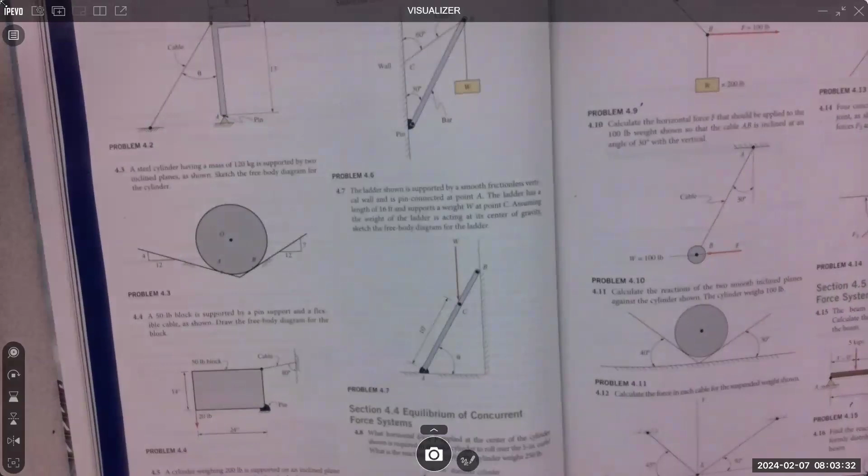So, 15 - how'd they go? How are you feeling about these? Yeah, pretty good. We need to go over it? Yeah, we should. That's okay. I think we should. All right, 15 and 16, back to the...

You didn't agree with the back of the book? No, I did. Oh, that's a good sign - most of the time that's a good sign. I didn't even look at the back. Nick, how are you? Good. Check.

Did you do the first set now of homework? No, because I already have your 15 and 16 set. I did that one again because I know I got the current one. Going back, I mean, I guess.

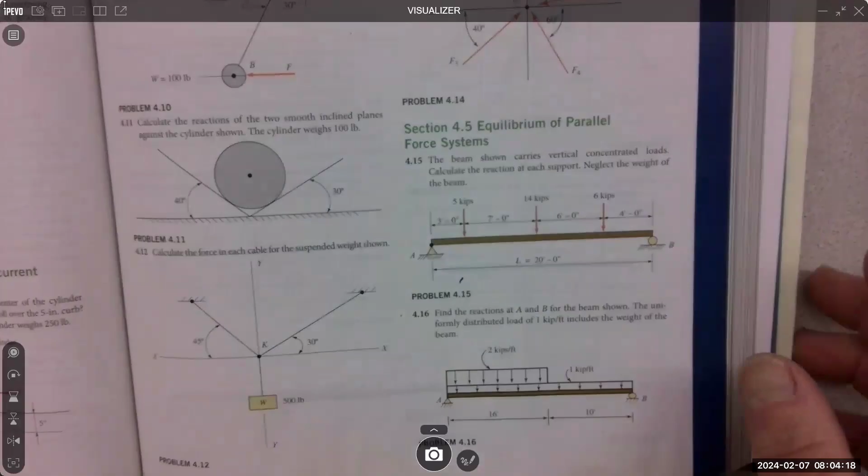Saving them for you. Yeah, all right. We'll do them - it's good prep for Friday.

How long do you think it's gonna take? I don't know, it was 8 problems last year. That was like... I think you should - I was like, maybe last year 2 problems, there's 7. 2 puts a lot of stress - that's a lot of stress on 2 problems.

50 real quick, that's like 50 points each. But if you just - you want to make them a 50-point problem? What if you screw it up? Just make them like the last quiz. I want to make them challenging for you so you feel good after you walk in. I don't think - feel good. I'm just gonna - no, about that, it's but like I hate it when I stress.

Like if you're gonna go for a run, you don't want to go for a 3-mile run, you want to go for like a 10-mile run to feel good about it. Not a great... you know? All right, I'll work on my analogies. Make the name half the point. You can write it down.

Okay, there's a free body diagram problem, that's like a free 20 points. I'm looking at 5 problems. 5 problems? Yeah, okay, so that should take like 30 minutes - if I struggle. Right, if you struggle. Okay, so 5 problems are gonna take me 30 minutes to do. So maybe usually multiply times 3, hour and a half.

Oh gosh - did you say if you have any review problems? We're doing them right now. Like everything we do today will be review problems, because after this, after we do homework sets, I'm just gonna review. Then we'll look at the homework set for Friday and work it, probably, or at least start it for you, so you have a good vibe going into Friday.

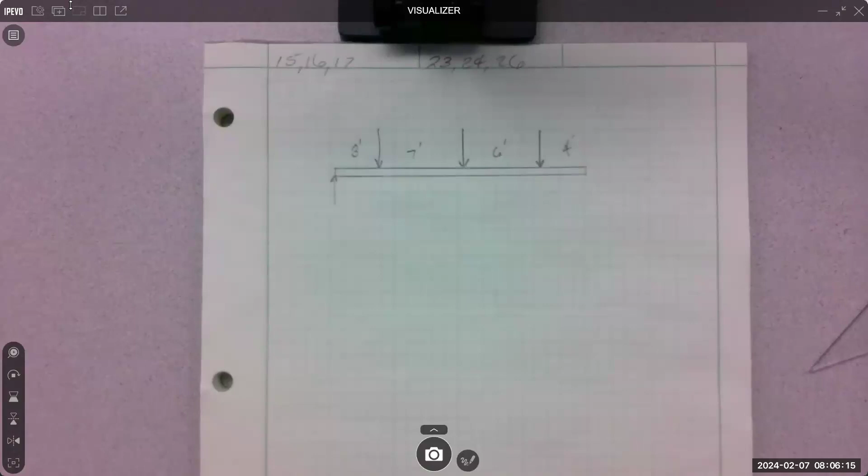Am I doing the right one? Yeah. Oh good, I don't wanna pull a Nick. How many reactions for a pin? I was just putting them in automatically. 2 - I'm gonna make a guess at up. Everything's coming down, so we need some up forces, right? How many reactions at B? Just one up, just 1 up, it's a roller. So that would be BY, AY, and AX.

5K - you can see this, right? Yep. 14K and 6K. 3 feet, 7 feet, 6 feet, 4 feet.

On Friday, it will say you do not have to draw separate free body diagrams on the problems. You can just kind of turn the problem into a free body diagram by putting your reactions right over the top of the supports, unless the problem says draw a free body diagram - then you should do that. That make sense? Yeah. So on the longer problems, you don't have to make additional drawings.

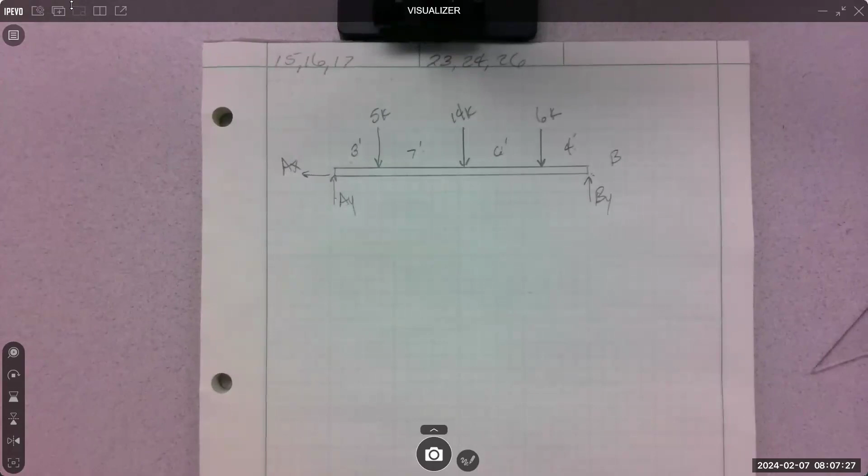All right, this one wants to know what? Exactly the reactions - calculate the reactions at each support. So I would need 3 things on Friday, 3 reactions, even though one of them is equal to 0 - yeah, I still want all 3. So even though you know AX is equal to 0, give it to me: AX is equal to 0. You can show me the equation if you want, if you don't, that's fine. I'll just know that you know, hey, if there's a single force in a direction, it's equal to 0.

All right, so then we need AY and BY. What are our 3 equations of equilibrium? What are the 3 equations? F of X equals 0. F of Y equals 0. And all the moments equals 0. Okay, so that is the definition of equilibrium, and that's the three tools we use for these. What kind of a force system is this - is it concurrent or non-concurrent?

Non-concurrent, because they don't go through the same - yeah, all the forces don't go through one spot. Yep, excellent. These kind of problems use all three. Okay, concurrent force systems are ones that look like this.

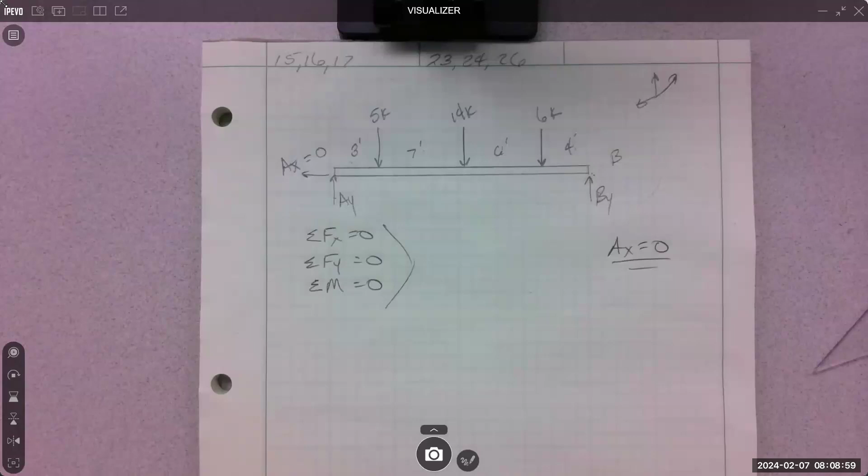Those don't use moments. There's no moment here, right? Because everything goes through one spot. So these just use sum forces in the X and sum forces in the Y. That's it.

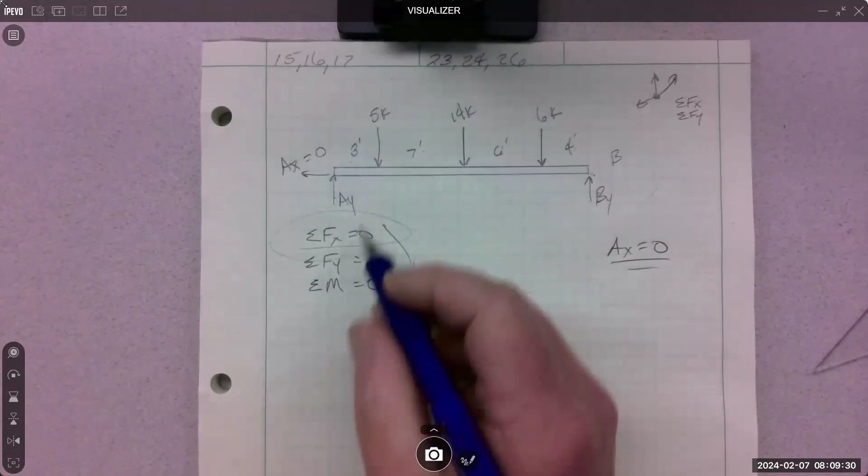No. Why not? Because you have two unknowns, two unknowns in the Y. Right? We could write it out. That's easy enough. And if you don't know what to do, just apply the equations, just write them out. Sum forces in the Y, what are all the forces in the Y?

Plus AY minus 5K, minus 14K, 6 gives minus 6K, plus BY equal 0.

On Friday, if you don't know what to do and it is an equilibrium problem, find the reactions, apply these equations, just apply, write them out, and you'll get some.

So this is when it says find the reactions, that's an equilibrium problem. If it says find the resultant, we're gonna have to remember what that means, because that's what we did for the first 4 weeks, right? This is week 5. So you're gonna get so locked into this, I'm gonna give you a problem on Friday that says find the resultant. And what are you gonna do? You're gonna draw me a free body diagram, and I'm gonna go, don't do that.

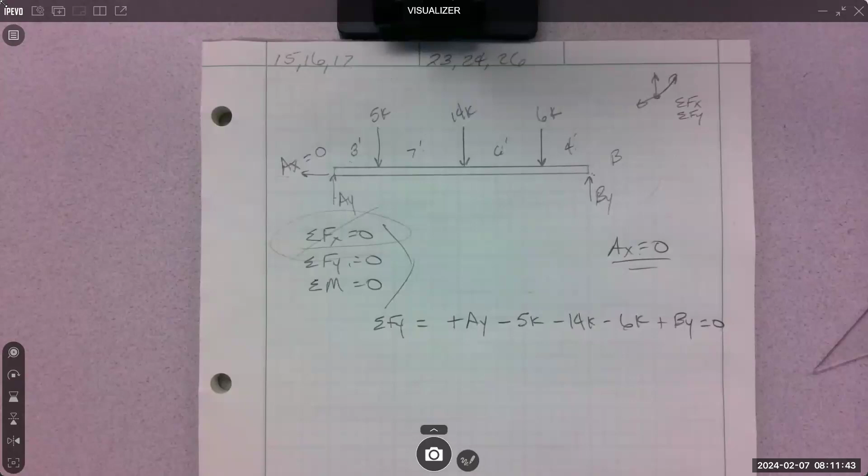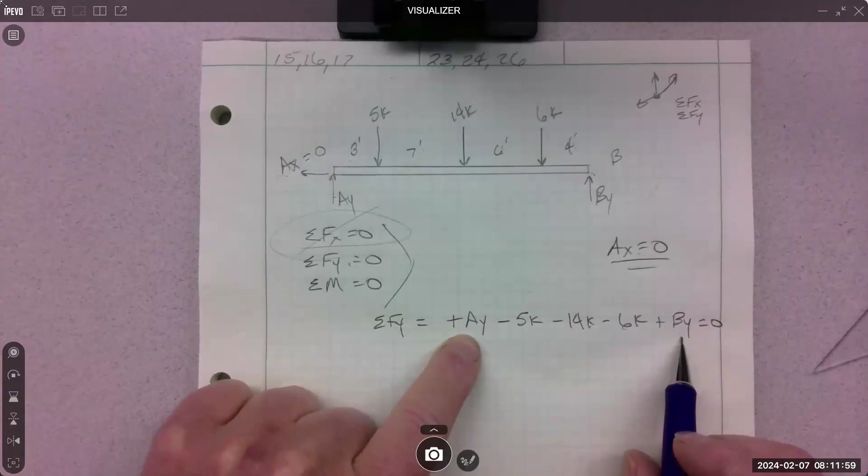Okay, so that's really important. You're gonna lock into that, like read it carefully and know your path. Because this is find the reactions, right? Not find the resultant. All right, 2 unknowns, we can't solve it. Correct? Correct. All right, what do we have left?

Yeah, moments. Most of these kind of problems, you're just gonna apply a moment right away to solve for something. Like I just start doing moments typically right away to get my unknowns. And then I might go back to summing forces in the Y. But you literally could go and sum a moment here, right? And what would be the unknown if I summed the moment at this spot?

BY. So I could solve for BY, right? And then I could do a moment here. And what would be the unknown? AX goes through the point, it would drop out. And we could solve for AY. So you could do 2 moments and solve the problem. You could also do a moment and then do this equation to solve the problem. So there's a couple paths that you can take.

All right, where do you want to do the moment? A. Why do we like A? Either way, it'd be the same. Just go with A. It will be, that's what I did. Either way, because we read left to right, so we always go to the left side. I mean, I do it all the time, right? But yeah, either spot is the same.

Because at B, there's 2 things that drop out if I do a moment here. What are the 2 things if I did it here? AX and BY drop out of the moment equation because they go straight through the point. If we do it here, what drops out? AX and AY both drop out. They go straight through the point. Okay?

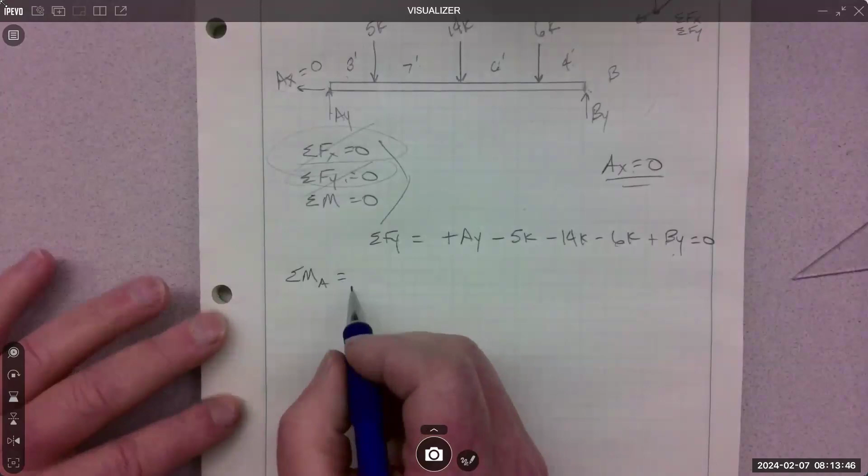All right, so let's do it today. After you decide where you're doing it, you just need to collect all the moments, everything that creates moment. Does the 5? Absolutely. 5K times what? 3 feet. What about the 14?

What's the rotation of this? Don't let me forget that. Is it going clockwise? Does the clock tick this way? It does, it's clockwise, it's negative.

Tell you, a crib sheet, a cheat sheet, whatever you want to call it, is more valuable than your book. You think it's awesome that you get your book? Well, it's 250 pages of trying to find something, right? But if you had a crib sheet with just notes on there to organize everything for the test, it's way more efficient.

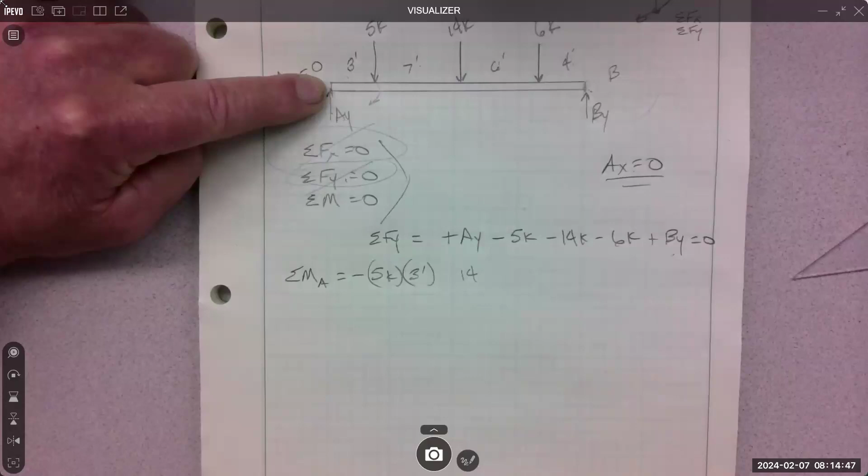I used to give extra credit for a good crib sheet. That'd be cool, should we do that again? Yeah, how many points? Well, 15 towards the exam, or how about 20, and you can eliminate one of the problems, toss it out. How many points is the test? It's 100 points. Okay, so actually that's fair, just turn in your crib sheet and walk out. Really, that's a good choice, great negotiation. Now I'm feeling pretty good about the 2 points that I want to give you.

All right, 2 points extra credit. If you have a nice crib sheet, it's gotta be a good crib sheet. It's gotta have chapters 1 through 4 included somehow. Does that sound fair? Sure, yeah.

All right, sweet. 14 times 10, rotation negative. 6 times 16, rotation negative. What else creates moment about here? By times 20, and its rotation positive. Set it equal to 0. You now have an algebra problem. Remember, this just goes away.

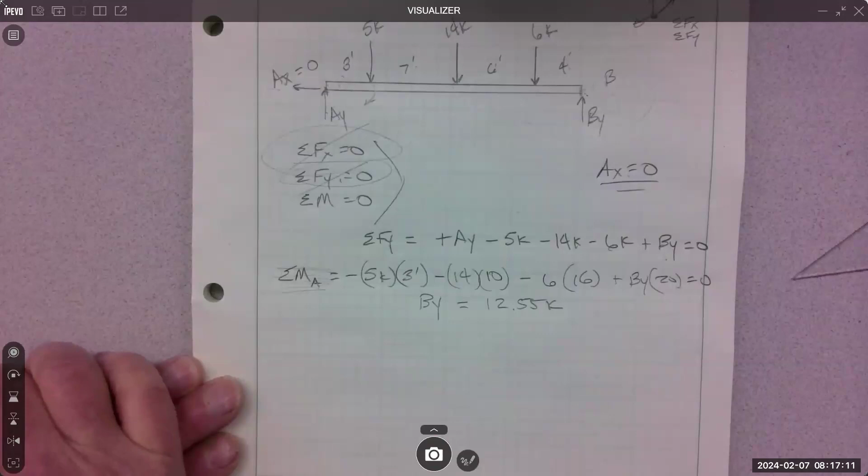All right, what do we get for BY? Somebody's got BY. 12.55 kips. Anybody else get that? Yep, thumbs up. And it came out positive, and that means our assumption is correct, our assumption of direction is correct.

So that'll trip up somebody on Friday, so be careful with that. If BY was pointing down and it comes out positive, that means you've made the correct assumption. It points down. We made the assumption it points up. We did the math, it came out positive. That means our assumption is correct in direction. All right, that means this is up.

So on Friday, the problem could say calculate the reaction at BY, and then it could give you information about that roller, like the roller at BY can support 15K. Determine if this is safe, right? So that would mean, well, we got a limit of 15K. We do the math, we figure out we're 12.55K at BY, we're good, right? Sometimes I try to make it a little more real than just an academic problem. Like, why would we be doing this? Well, we might be looking at this roller to determine if the load's okay on there.

All right, how do we get AY? Plug it into the Y equation? Yeah, so we take AY up here... 12.55K going up. Let me calculate BY. Oops, BY, sorry, I got reversed. And we calculate AY, right?

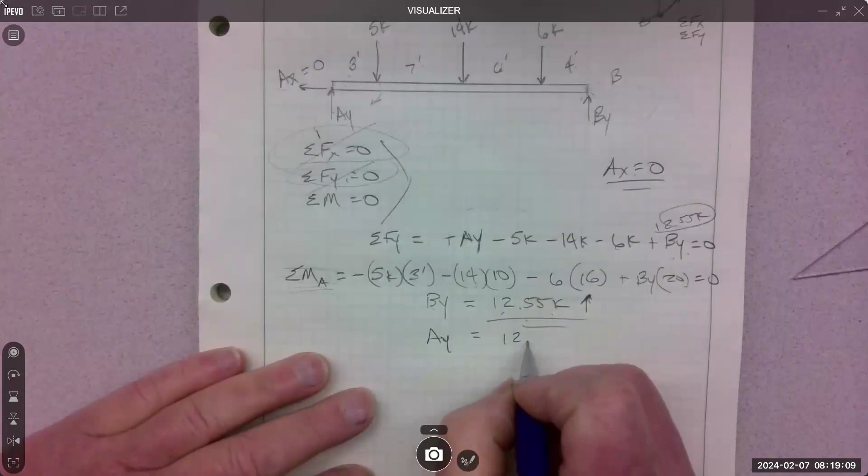What'd you get for AY? 12.45? Anybody else get that? Not that I don't believe Gina, but I believe Gina. So there they are, 1, 2, 3, right?

Find the reactions. Easiest problem because everything's parallel, right? If we had an angled force in here, how would you deal with that? Yeah, you just break it into its components and know that the X component would not create moment anywhere, and you would deal with that Y component for the moment piece.

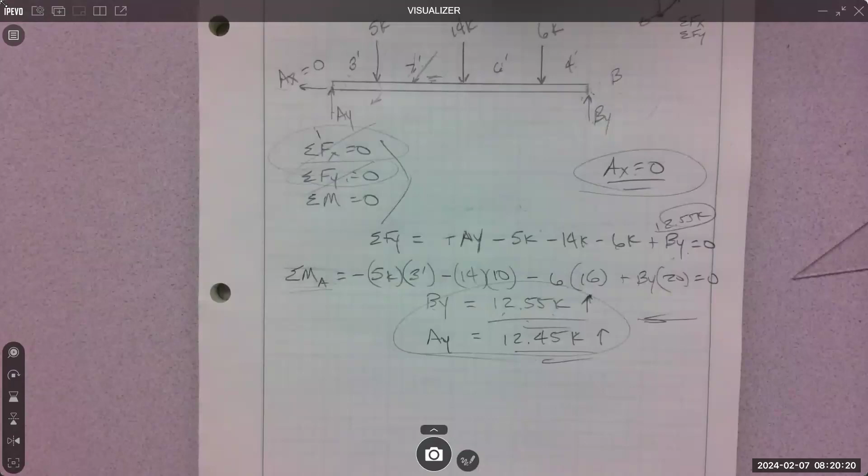Okay, so we've done some of those too. They're not difficult, problems are not difficult on Friday. They're of the simpler kind of problem. So if you have a resultant problem, it's not going to be a super hard one. Find the reaction problem, it'll be kind of similar to the ones that we had in quiz. Now, it might look like you're going to have to determine if it's a concurrent or a non-concurrent system, like it might not be straightforward. You might end up with a beam that looks like this, right? Has a roller, has a pin, and then has a force, and a force.

If it says find the resultant, that means don't mess with these forces, leave them there. We just want to know what the single force is of this thing. Is it concurrent or non-concurrent? It's concurrent, it's all right there. Even though I put it on a beam, all the forces are still in one spot. We would turn all this into some resultant single force.

So just identify the force system and identify what it's asking you, and then have a strategy ready to rock, and you'll be good to go.

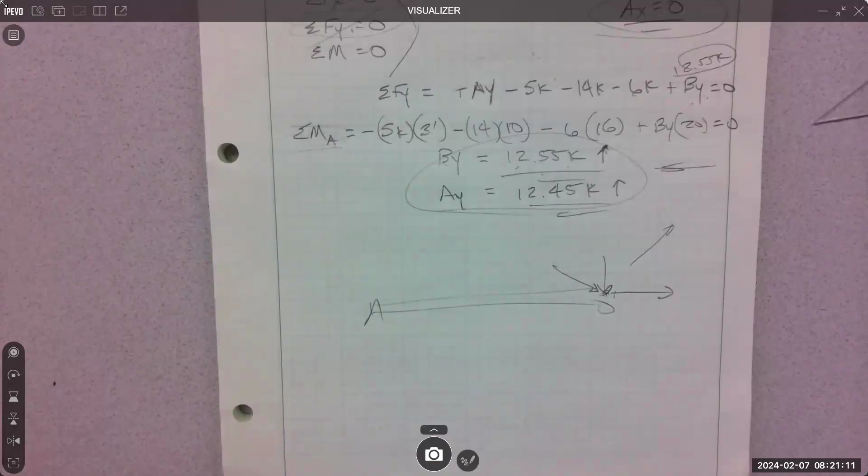All right, 16 had some distributions. Same problem, find the reactions. Have a distribution that goes more than halfway, and then a smaller distribution. There might be a little off scale there.

What do we do with these distributions? Concentrate them. Concentrate them. Love it.

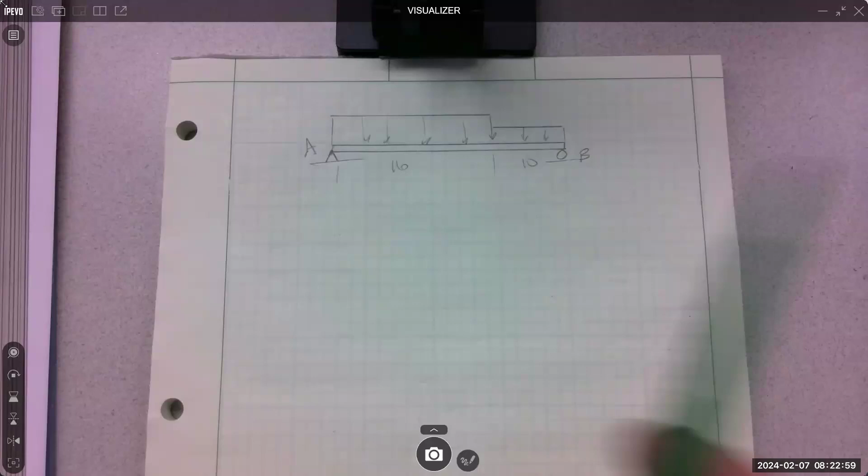What are we trying to learn when it says find the reactions? Find the reactions at the points. What are they called? They're not called points. Supports. Yeah, we want to find out what's going on at the supports. What are the supports on this problem? Pin and the roller, yeah.

Assuming that's a pin or a knife edge, either one, hard to tell. They didn't tell us, did they? They just said find the reactions. A pin gets how many? Two. Which way do you think they go? Up and somewhere. Not a lot of X forces going on.

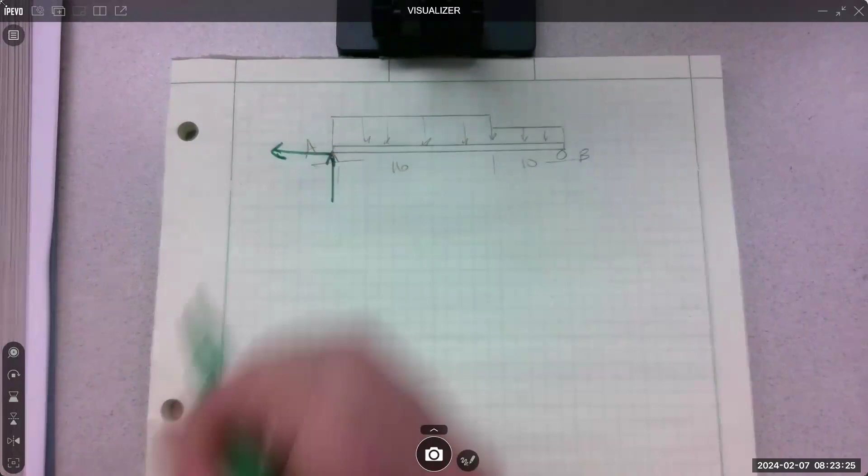AY, AX. So because it says find the reactions, these are the reactions, we gotta put them in to find them. And a roller gets one vertically upward, BY. We got 2 kips per foot, and we have 1 kip per foot.

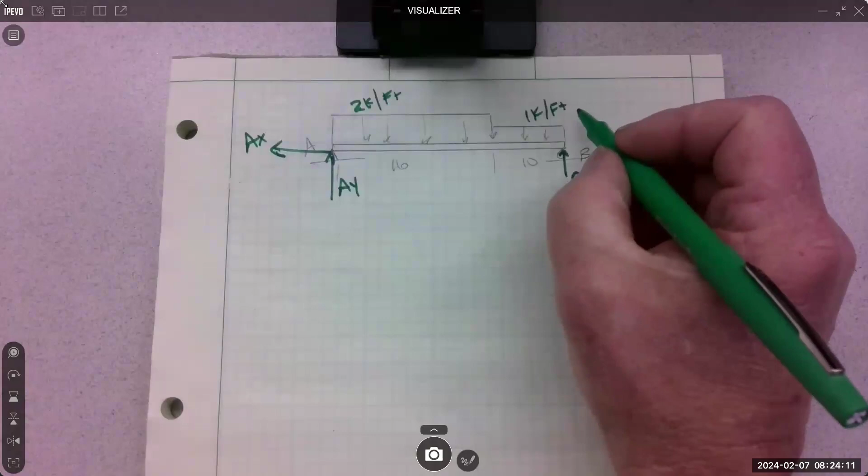All right, how do we concentrate? We think really hard, right? Area of the distribution. So the way it's drawn, I don't know if this is gonna make a difference, but the 1 kip per foot is across the entire beam.

Oh, that's important. That's how I understood it. No, I don't think so, like the force. Yeah, we're making an assumption here. This is an assumption you would want to make. So what is it? Is this 2? So that's one assumption, making the total height what? 3. Right? Or the assumption is this is 2.

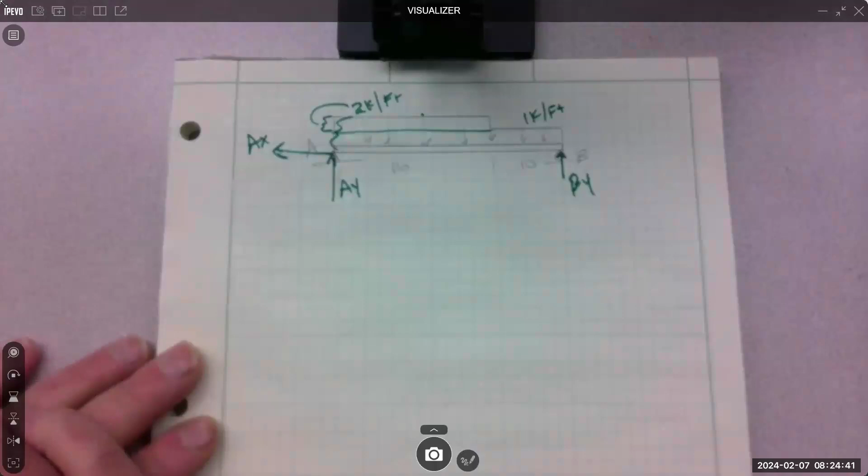Yeah, so it's tough, you've got to get different arrows, especially because they drew it all the way across. It's supposed to be the weight of... oh, is this the weight of the beam? That's what we were debating. Ah, so there we go. Well, it solves the includes problem. It includes the weight. It says the 1 kip includes the weight of the beam.

So it's the 1 kip, that's the weight of the beam, yeah. It's a really poorly worded problem, but good in that you have to make an assumption. If you note this assumption, you're not gonna get it wrong from me. This is a fair assumption either way, whether this is 2 to the top or whether this is 3 to the top.

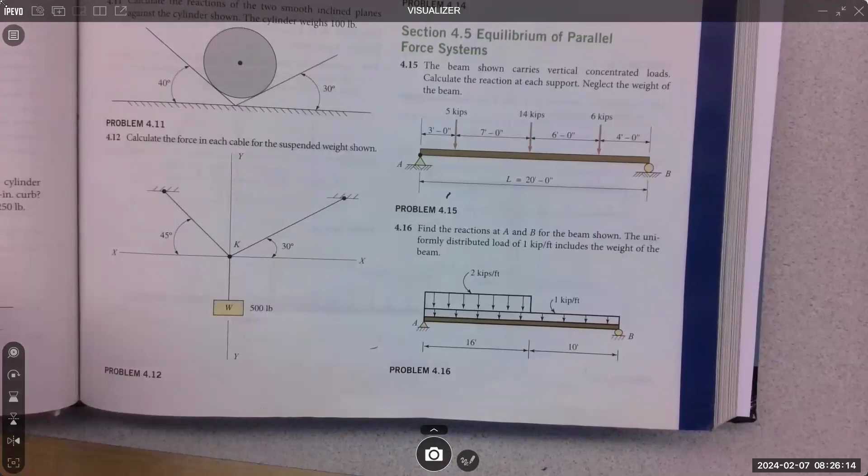So now that it says something about the weight of the beam and includes the weight of the beam, I would say these are cumulative. Because if you had the weight of the beam and then you had a 2 kip per foot distribution, you'd have to add those together to get a total of 3 on a certain part of the beam. So that would be the way I would assume it, because it says this 1 kip per foot includes the weight of the beam. That means the 2 kips per foot is an external load of some kind, and this is some kind of internal load, could be the beam and the platform and structural components that go across. That could be all of that structure, and then we put 2 kips on top. If you didn't assume that, that's fine, you don't have to erase it. But I would say this is 3 up here.

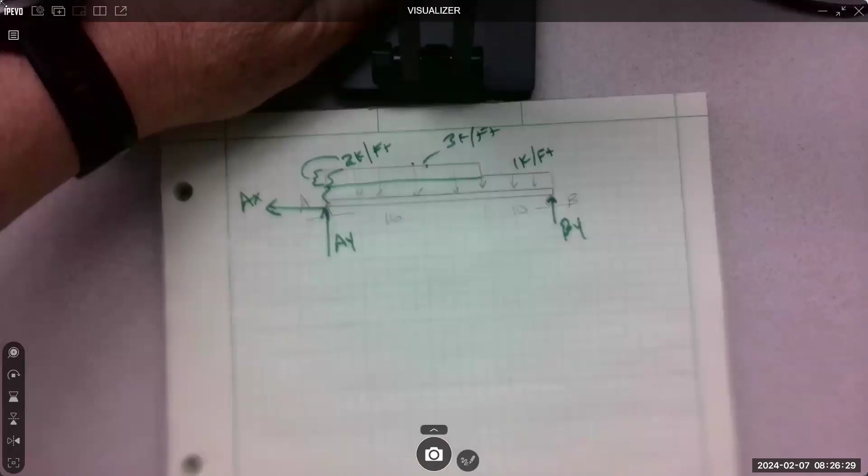Making this, including the weight of the beam, total in a certain region. So the concentration for the 3 is 3 times 16, right?

32, 42, 48. Yeah, 48 for the concentration, is that right? Yeah. 48K. We did it different? Made the other assumption?

So 2 kip feet, 16 feet. Yeah, that's fine, that's fine, matches the 1. I'm okay with that assumption.

I think it's fair, I'm not making that assumption. So that means we have 1 kip foot here at 10, which is 10K. Should be a different color maybe, don't know if we have a different color. So we got 10K here and we have 48K concentrated.

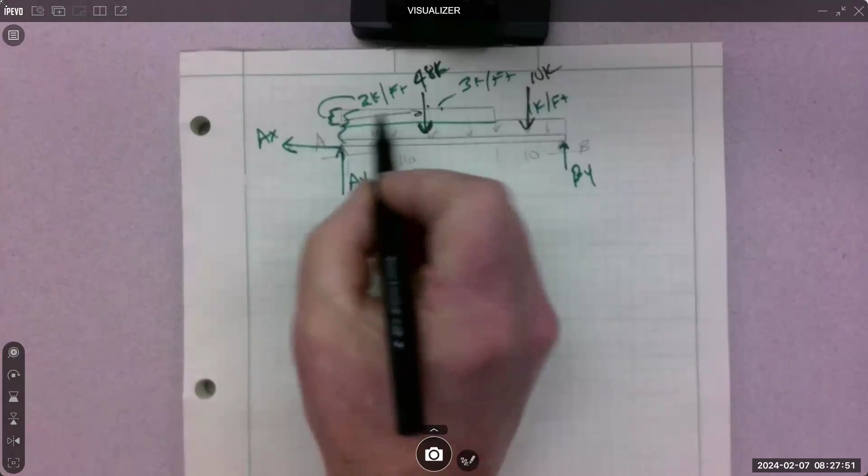Yeah, this is 8 over. And then this is 5 over. Good, concentrate it. And then go to work, right? Probably straight to a moment. Where'd you do your moment?

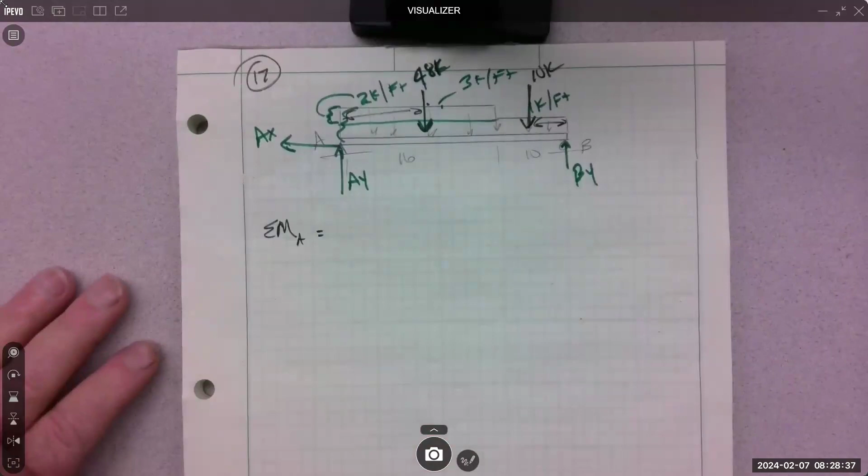Eight's a good spot. Everyone see where I'm getting the 48 and the 10? Yeah, okay. So moments about A, I'm gonna take the 48K times 8 feet, and that rotation is negative. And I'm gonna take the 10K times, looks like it's 26 minus 5, 21 feet, and negative.

We're doing it here, moment at A. 26 minus 5, 21. And then BY times the full 26, and its rotation is positive.

So if you made this assumption, 3 kips per foot assumption, you end up with 22.85K.

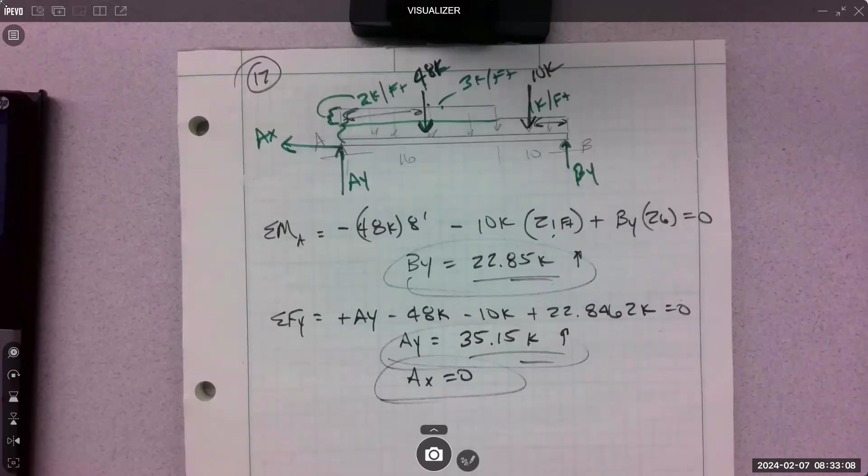That's doing it the same way, you just broke it into two shapes. Yeah, okay, well like we didn't stack the 2K. No, you didn't, you did them individually, you broke them into two shapes. Exactly, perfectly fine, that's fine.

You guys are like, what? How's this happening? Yeah, I was too for a second. Oh, I get it.

Which is actually a really good point, right? You can take the distributions and break them up however you want. So I don't know if the rest of you are tracking that, but Juan and Sean used this bottom distribution, concentrated it, and then the top distribution and concentrated it. So those are just different concentrations than I did. I did this, right, and then this.

It doesn't matter how you break up the distribution, you'll get the same number. And they got the same number we did, they just used two different shapes. It's fine, especially when your shapes get really complicated.

Excellent. Does parabolic curves on that, or triangles? We have it, yeah, just triangles. It'd be pretty evil for me to give you a parabolic. That's what I was thinking. It is in the front of the book, and you are fully capable of calculating these areas.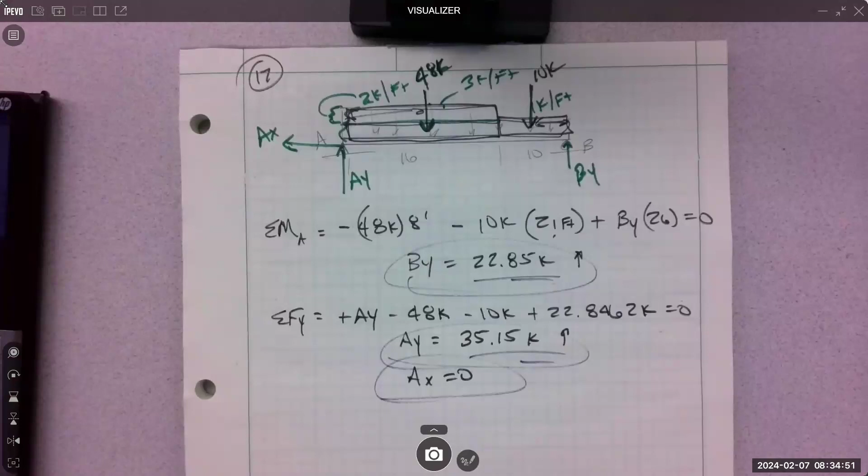I know you are, right? You can do that: 1/3 the base times the height, and then the location would be b over 4 and 3 over 10 times h. You're capable of that, but I'm not giving it to you, we haven't practiced it yet. There's always exam 2 and the final, you know, for me to stack things on.

No, you don't think? I think you're gonna feel good if I do. If I give it to you, you're gonna feel good about it. You don't—alright, turn them in.

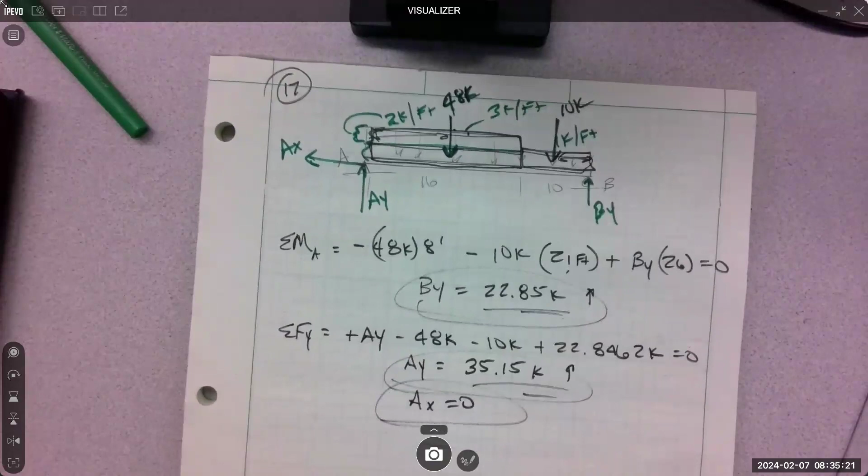That's 15, 16, and we already did 17. 23, 24, and 26 is your homework, so we're gonna look at those next.

You need a break? What? Let's take a 5-minute break. Coffee is going well.

Whoops, all right, we'll get 24 captured. Sorry about that, which one is this? This was 23. Here's 24. Are we gonna get extra credit for that? Wait, what did that one say? What extra credit would you want for that? I don't know, I'm confused. You're just making shit up on top of it. Yeah, as many credit as possible. I'm gonna start cussing.

Number 24, we got 120 pounds. We got 800, 26, we just did in the center, 800 in the center. And then we got 400 at some crazy angle. 8 feet, 7 feet, and 3 feet. I have the book open.

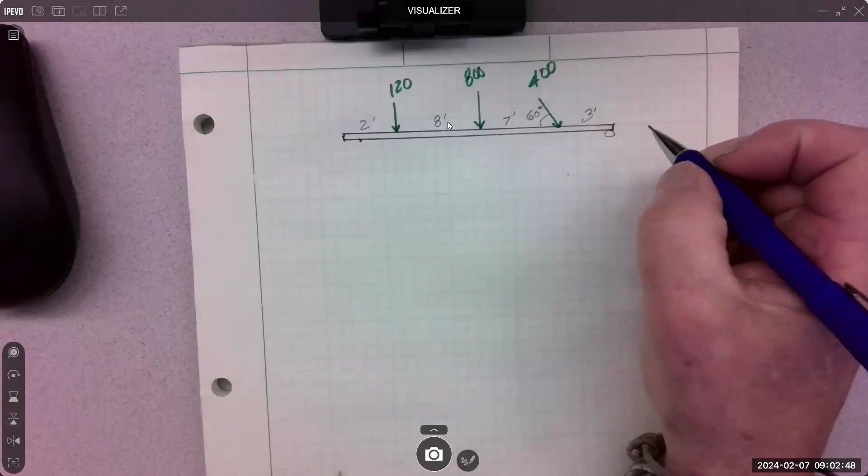What are the units for the forces? They are pounds. A, B. Also, I know you answered this before. Normally I don't use the arrow, up or down, I just use that sign. But you would understand the answer, right? So I'll go by signs for sure. So that means if you leave the negative off, I'm gonna assume you meant it positive, so just be careful with that. But yeah, absolutely, because I'm not used to write that. No, it's fine. This one says...

Determine the reactions for the beam shown. The beam has a pin support at one end and a roller support at the other. Neglect the weight of the beam.

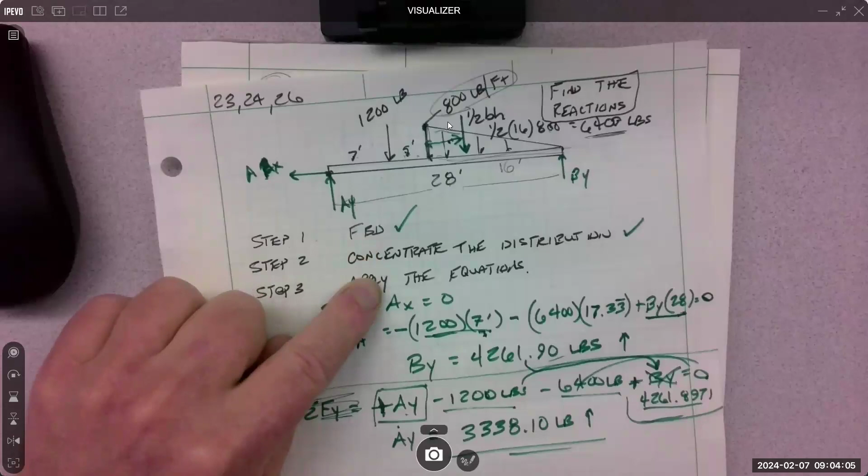Reactions. Step 1, free body diagram. Step 2, concentrate any distributions - we don't have any. Step 3, apply the equations. So free body diagram first, let's do it right on top of the existing drawing.

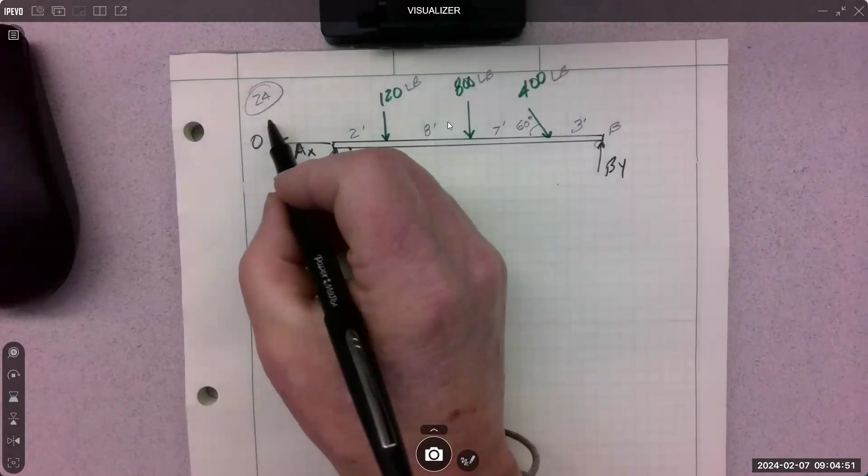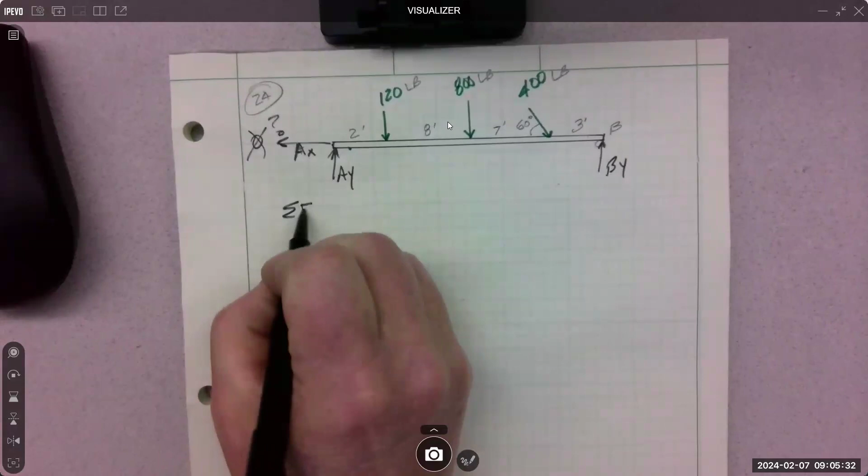Is AX equal to 0? No, it is not, so don't just do that automatically. There is an X force. What's AX equal to? The component of the 400. Those are the only two X forces, right? So I put AX to the left, is that correct? Yes, because the X component of the 400 goes to the right, and they've got to be equal and opposite. For equilibrium to be true, summing the forces in the X has to be equal to 0. So that's a good place to start.

Now, how you do this is up to you. You can draw those little components in, or you can just go straight to the equation, whatever is comfortable for you. I tend to draw them in. So, X of the 400 and Y of the 400 is the notation I use, because there could be other X's and Y's and you're gonna have to keep them straight if that's true. And then I just put the equation in the formula.

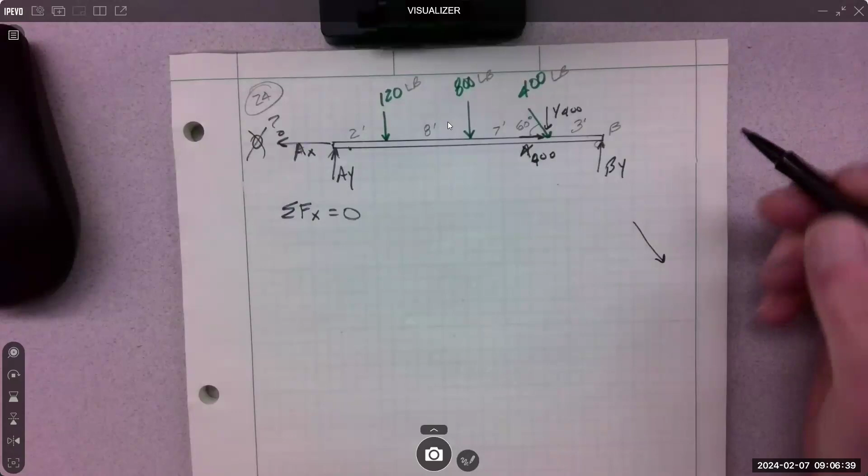Sometimes I pull the 400 off to the side just to make it a little more clear. And then put in the X and the Y and my angle of 60 degrees. Transfer this over, make my triangle X, Y. So if that helps you, do that, right? Because then you can write the equation for the X component, which is going to go in this, right? It's adjacent, so it's cosine 60 equals the X over the hypotenuse, which is 400. Right? And it's this X component that I want in this equation. So then I could solve for that. X 400 equals, you can come up with a number or you can write the equation, whatever is comfortable.

Cosine 60 - that's just a number, right? This is just a number. So I can calculate that number and put it in the equation, or I can put this in the equation. Either one.

For future reference, guys, when you have a 60 or 30 degrees, the opposite or adjacent leg would be half of the hypotenuse automatically. Okay, no shortcuts, it's my philosophy - I always write it out, never try to memorize that stuff. I only have so many memory cells, I got other stuff more important, I got to remember my kid's name, more important than the cosine of 60.

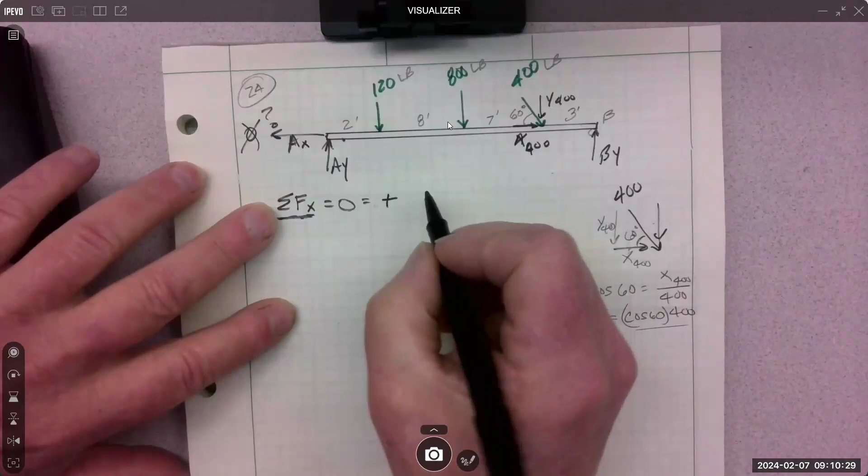My X component goes into the X equation, correct? Yeah, is it positive or negative? It's definitely positive, and I'm just gonna write this in. You could use a number, because it is just a number. Right, but that is the X component of the 400.

And I am doing sum forces in the X. What other force do I have in the X? AX - there's only two of them, correct? There's the component and there is AX. So that means, and it's all equal to 0, AX equals cosine 60 times 400. Jorge says that cosine 60 is a half. He is so correct, and that's equal to 200.

So basically, are you just checking your answer at this point? No, that's my answer. It comes out positive, so that means the assumption is correct, AX points to the left. Does that work? Like when you make the assumption and you're assuming it goes in that direction - yep, it's always positive? No, even though it's going in the negative direction - yeah.

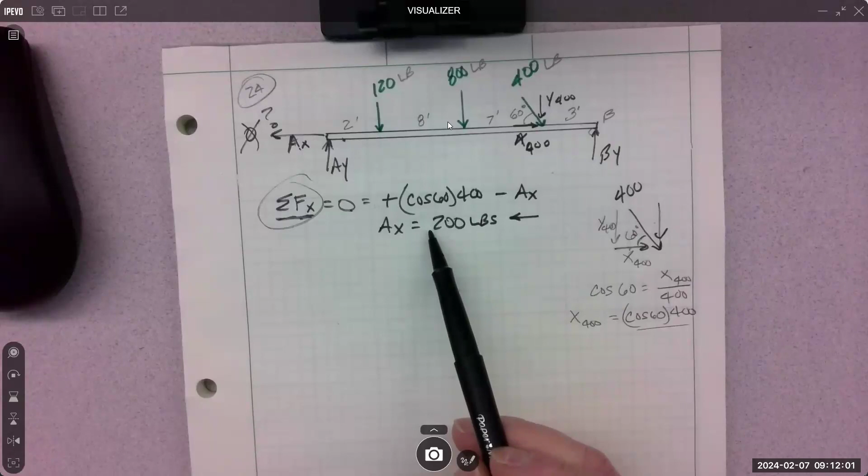That's confusing for people, I know, so try to sort that out. The number from the equation comes out positive. Right? That means your assumption of direction is correct, that it does point to the left. Okay?

Wait, so 200 pounds is pulling, AX equals 200 pounds that way. Has to be, because this one is pointing that way - it's equilibrium, gotta be equilibrium, equal and opposite. This equation has to equal 0. You look at it, it looks like the only arrow pointing would be pulling away, but if it's an equilibrium, you would need that fully opposite. This is the reaction, reacting to that load.

Yep, if I push on you, you'll push me back, kind of thing, right? Or somebody's gonna fall over. Excellent, those couple light bulbs just went on, I think. They're dim light bulbs, we're gonna up that wattage at some point.

All right, so what do I do next? Yeah, let's go to moment, because if we sum forces in the Y, we're gonna end up with 2 unknowns. So let's go for a moment. Where do you want to do the moment at? Sum moment at A. All right, what are all the moments about point A? We're good at this part.

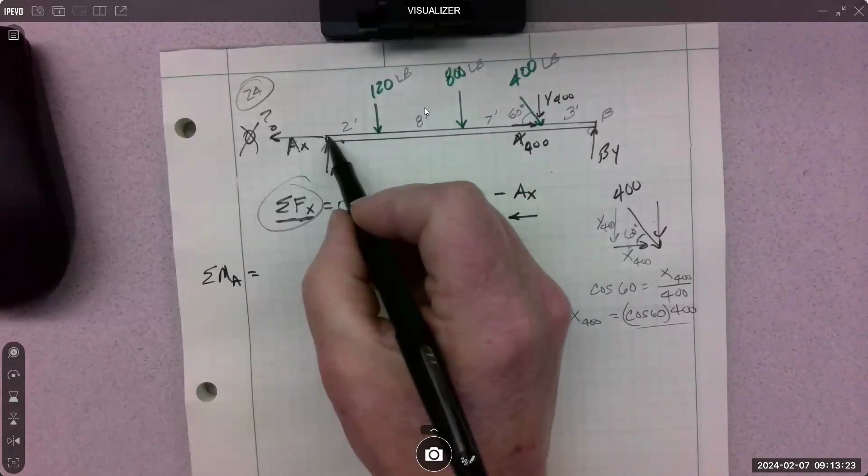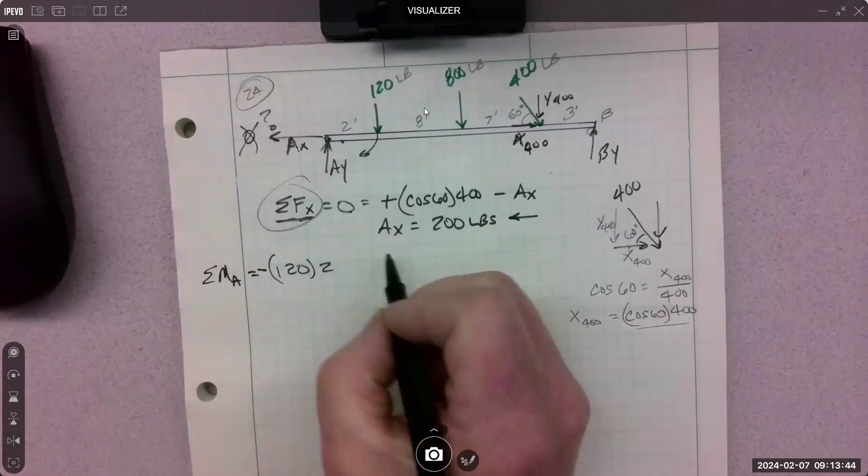120 times 2 rotation - negative, clockwise negative, rotating like this. Don't forget your moments or rotation for the sign, 800 times - clockwise rotation, negative, same rotation, negative. All right, now we have this 400 thing.

We want to use what? Yeah, we want to use this Y force, because the X goes straight through the point, so we do not need a moment for the X. It drops out, but we need a moment for the Y force. So we need the Y force.

And yeah, that's going to be sine 60 times 400, and I'm going to write it in just like that. Is it clockwise or counterclockwise? When the answer comes out positive, it's - hang on one second, sine 60 times 400, that's the force. Agreed? We have to multiply the force times the distance. We're doing moments.

So it's force times distance. How far is it from here to here? 17 feet.

All right, question: when you do sine 60 times 400, it's a positive number, but that's still just there. Yeah, so that's just the magnitude of the force. When you're doing moments, you just think about rotation, not whether the force points up or down. We don't care about that. We care about rotation when doing moments.

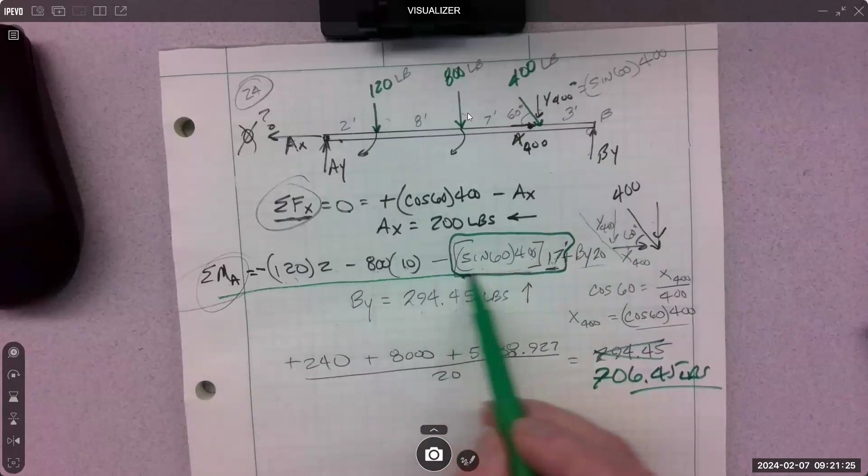Equation's good - I was all confused. No, you weren't. Actually, the first time I got the wrong number, and then this is the goal right here. Hopefully we can do the algebra. But this is the goal. Oh man, that was good. That was good, I loved it.

What do we have left? Yeah, AY. I'll let you calculate that. I don't want to make a mistake.

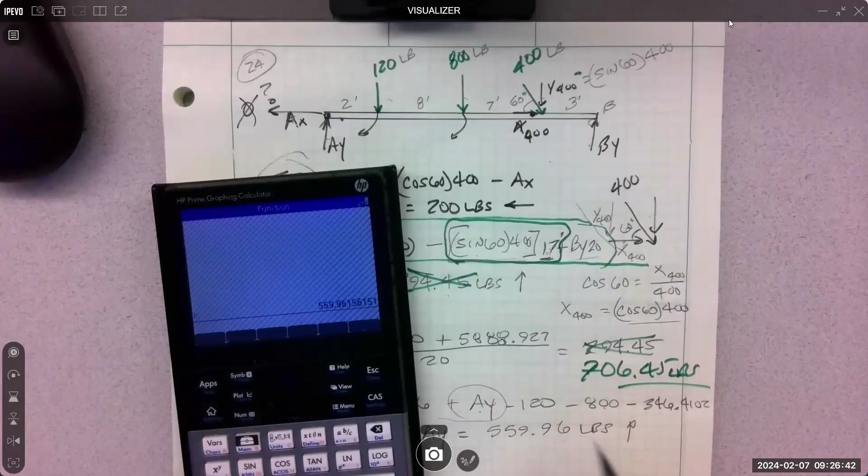All right, there's 26. I want to leave enough time to review resultants because that's half the exam. Stuff we're doing right now is half the exam and resultants is half. So we can do 26.

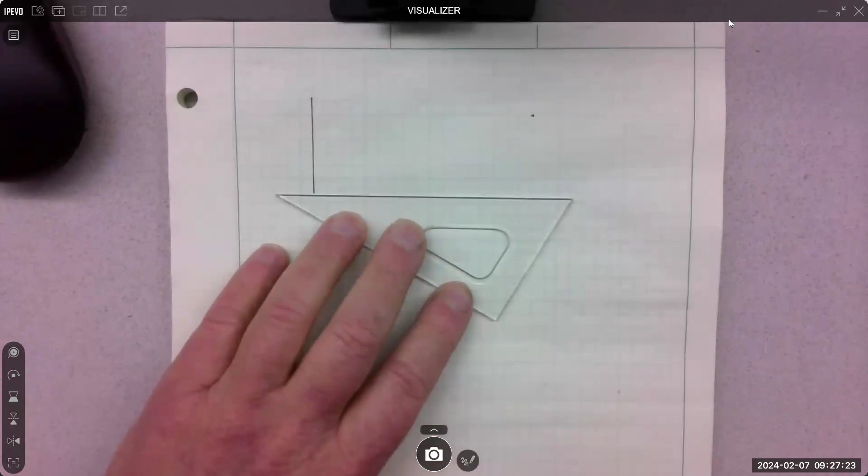It looks complicated, but it's really just a structure. I'm not even going to draw all those internal parts in because we don't need it. We're not solving the truss componentry, we're just solving for that and that. That's all we're doing, the reactions. We will get to trusses, that's chapter 4.

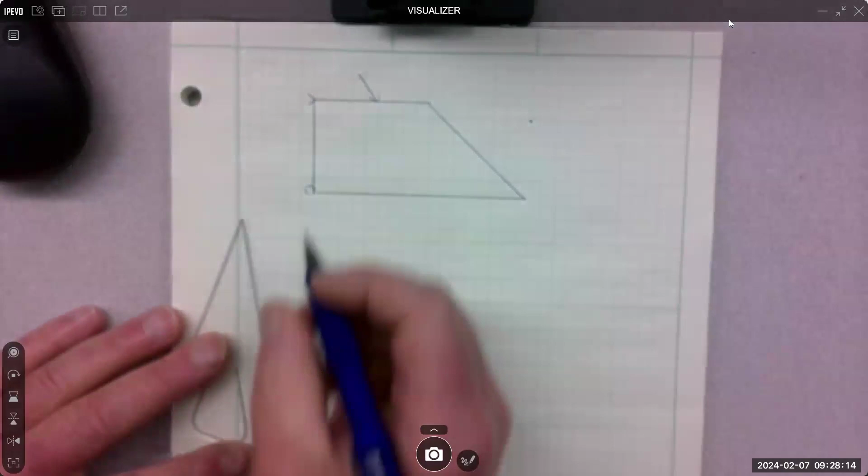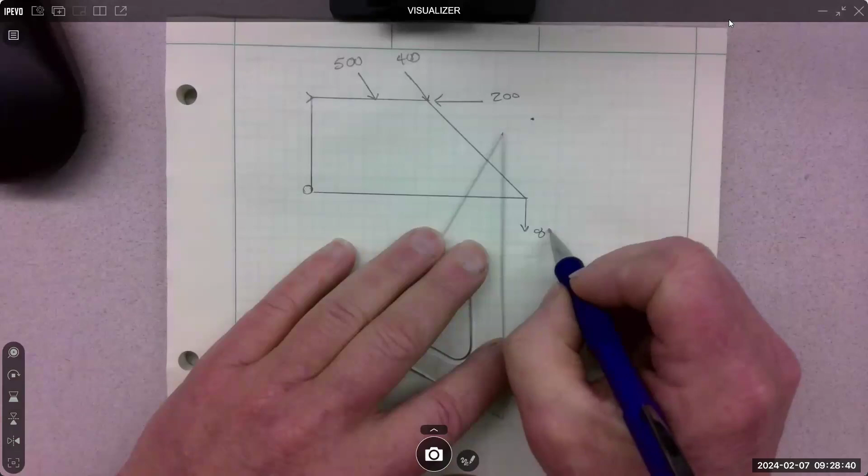It's not an easy one because it has all these angled forces. Those are all pounds, and we're 6 feet here. Each one of these sections is 8 feet, so my scale's a little off. And these are at 50 degrees. This is A, this is B.

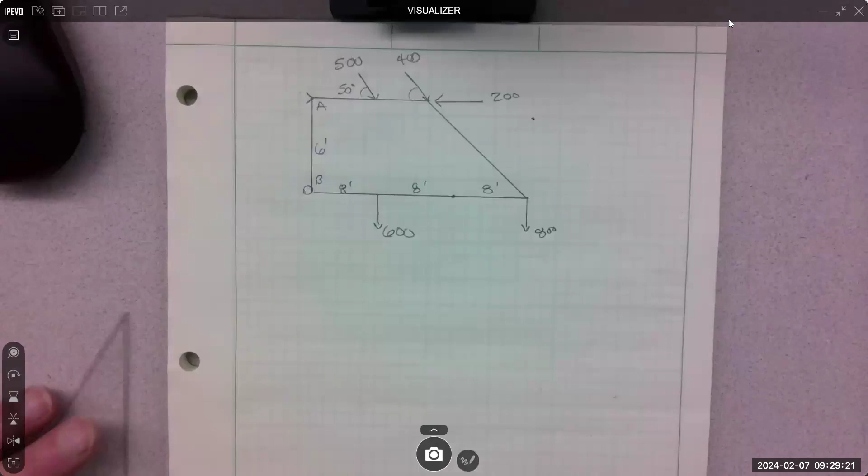And it says find the reactions. Correct? Calculate the wall reactions for the cantilever truss. The upper support is pin, the lower is a roller, neglect the weight of the truss. Same problem, find the reactions. What was step 1?

Free body diagram. Draw a line and just transfer everything to the same line. Don't get ahead of the steps, do the steps in order. Well, for the free body diagram, you wouldn't want to do just along. No, you want to put them where the reaction is, because those reactions are at those supports.

Because I was thinking that doesn't apply here. No, well, it doesn't apply, but not for the reactions. The reactions are at a specific spot. The roller's at B and the pin's at A, so that's where the reactions gotta go. So we remove the roller, we remove the wall, and we put the reaction in.

The reaction from a roller is always perpendicular to the surface removed. So the wall was the surface, we remove it, the roller is perpendicular to the wall. So the roller reaction is here.

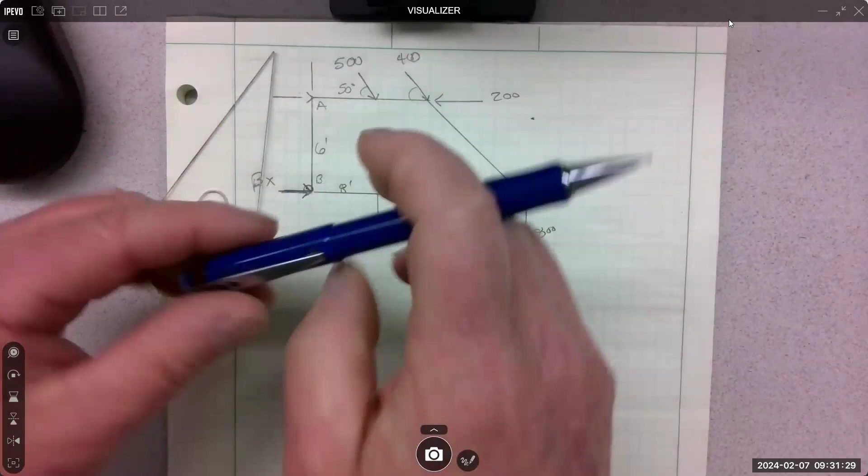How many does a pin get? Two. So there's one here, and there's one here. And then that pin is gone, that roller is gone.

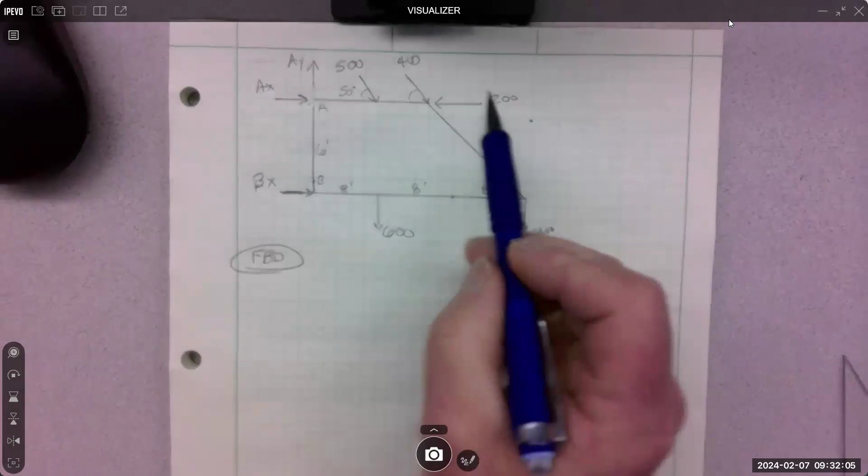Which way do you think they go? AX and AY. Yeah, so let's make that assumption that AX goes in and AY goes up. It's a guess, we're not sure. There's a lot of forces going on out there. There's the 200, there's all these X components, there's a lot going on. So I really don't know which way AX goes, so I'm guessing. So that's step 1, free body diagram.

Step 2 was concentrate any distributions. Do we have any distributions? No. Step 3, apply the equations. So let's just do them in order.

Sum of forces in the X. What are all my forces in the X? Plus AX, plus BX, I heard the 200 minus 200, right? I picked off the easy ones so far. BX, AX, yeah, we need these two components.

So they are adjacent to the 50 degrees, so that's going to be cosine 50 times 500 and cosine 50 times 400. And those are going which way? Yeah, both of those components point positive.

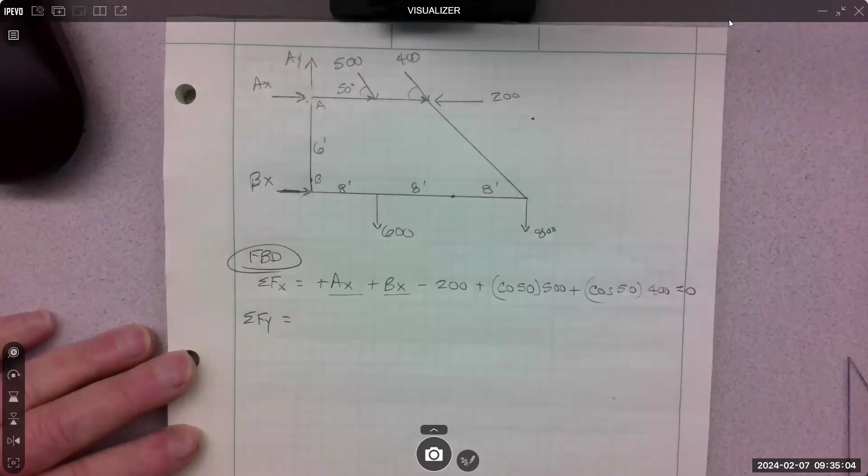What's the next equation? Y. Yeah, sum of forces in the Y. What are all the Y forces? Plus AY. Pick off the easy ones.

Yeah, so we have these components coming down, so we can write sine 50, 500. Sine 50, 400. And those are coming down. Yes.

Picked off all the Y forces. How many unknowns? We have one unknown. So we can use this equation to solve for one of our solutions. All the signs change as we move them to the other side.

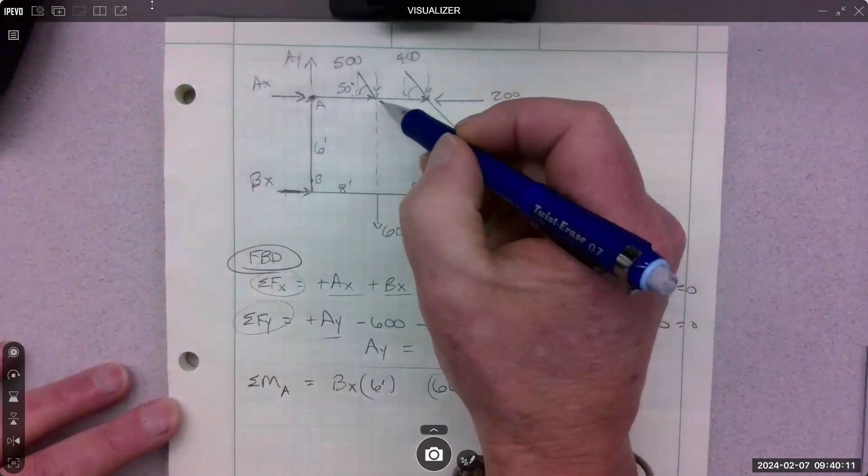600 times this one, line of action is here. That distance from here to here is 8 feet. Rotations, I have to think about those. This looks like it's positive. This looks like it's negative.

What about the 800? What's it times? Line of action is here. Perpendicular distance is here, 8, 8, and 8 is 24. Its rotation? Yeah, negative. Well, those are the easy ones, if you can see those distances.

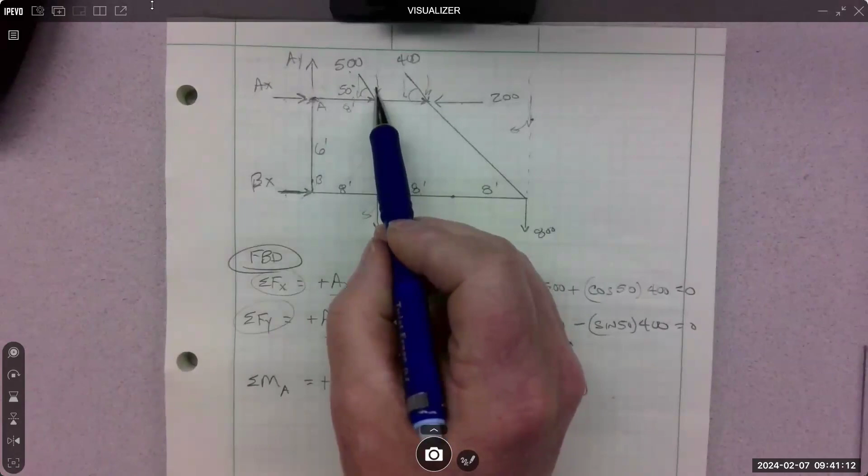Now we need the components of the 500 and the components of the 400 in the Y. So yeah, that's sine 50 times 500, that's what that is. Sine 50 times 400 is that one. So I can write, I'll go with 500 first. I'm gonna go down here and say sine 50 times 500.

That's the force, that's this, times the distance of 8 feet. Super easy to forget to multiply by the distance. So find the force, multiply by the distance if you're doing moments. That rotation looks to be negative.

And then we have one more. And the distance for this one, 16.

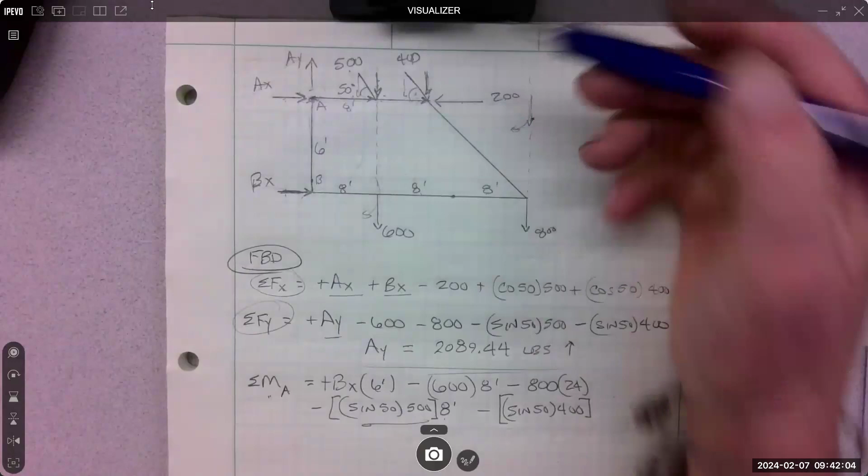Yeah, it's getting real.

Not a truss problem, just a truss structure that we're finding the reactions of the supports. The full truss problem will be next chapter, and then we will find all of those supports inside the truss. So the problem will start with this, and then you'll go inside the truss. Talk about a long problem. We'll get like one of those done in 2 hours. Good times.

All right, somebody give me a number, BX. I'll come up with it.

I did not. I'm gonna run it again though, before I commit, but don't forget the 8. Don't forget the 16.

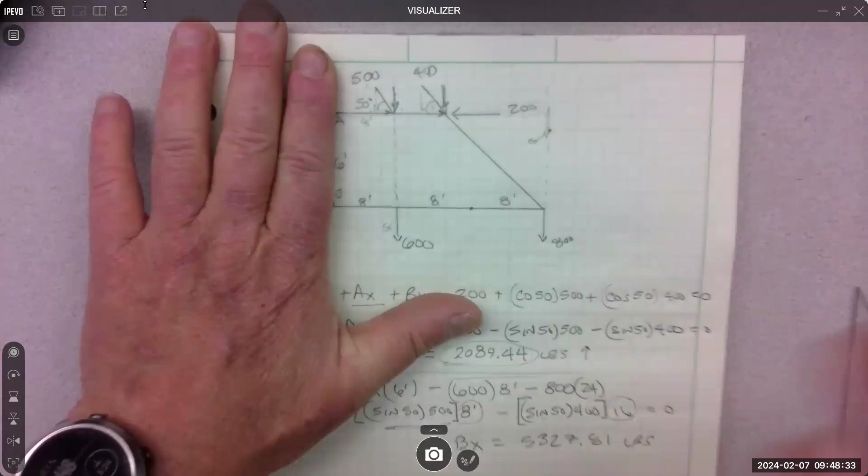Is the recording on? Yep. So, I would never do this to you, but this problem could say find the resultant. Right? And that would mean don't put those in, and that you have to take all these forces and collect them in one spot. I wouldn't do that to you.

So let's look at what I would do. So this is basically the homework, right, for Friday? Yeah, you just did it. So now all you have to do is study for Friday.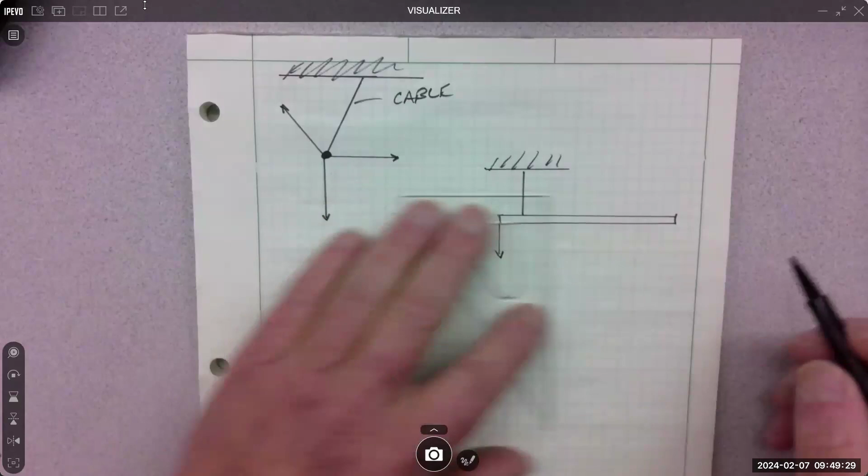I didn't realize my calculator could do brackets and parentheses separately. The whole scientific calculator can do that. I don't remember how to do what. I know, that's why we're doing it. Think it's - look at it.

It's nice. Yeah, right, it helps to differentiate. Yeah, so I know what's...

Well, let's see what you... I like reacting instead of... yeah, the cable at an angle. Yep, what's the angle?

Okay, this is super important though. Do you need it? If you're doing resultants, do you need the angle of the cable? No, it's a support. You ignore supports if you're doing resultants. So it would be evil for me to give you the angle, because then you tend to use it.

I'll give it to you. No, that's fine, that's 70 degrees. No, it's a good point though. That's why I've put supports in that are weird, because you gotta know the difference between resultants and reactions.

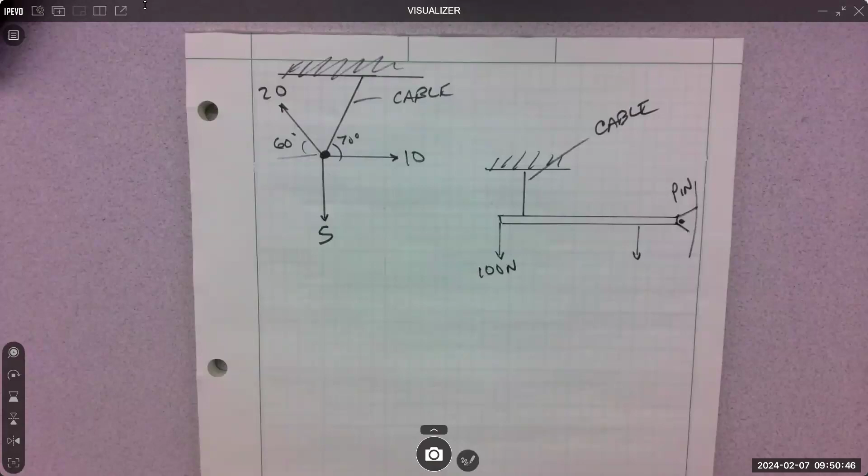Wouldn't that add up to 200 degrees instead of 180? Oh, so it couldn't be 70? It can't be... or is this not... yeah, no, it could be. Yeah, it can be 70, because it's 180, so what you do is 180.

Oh my God, you guys are gonna get sidetracked from what we're actually trying to learn. So I'm gonna pull that out. You don't need it, all right, there you go.

You don't need it, I know, we don't need it. That's the point. That angle right there, you can find it, it's just 180 minus 60 and minus 70. Let's focus on resultants, not on what the angle is. All right, holy smokes.

Love it. 1 meter, 6 meters from here to here, and 1 meter.

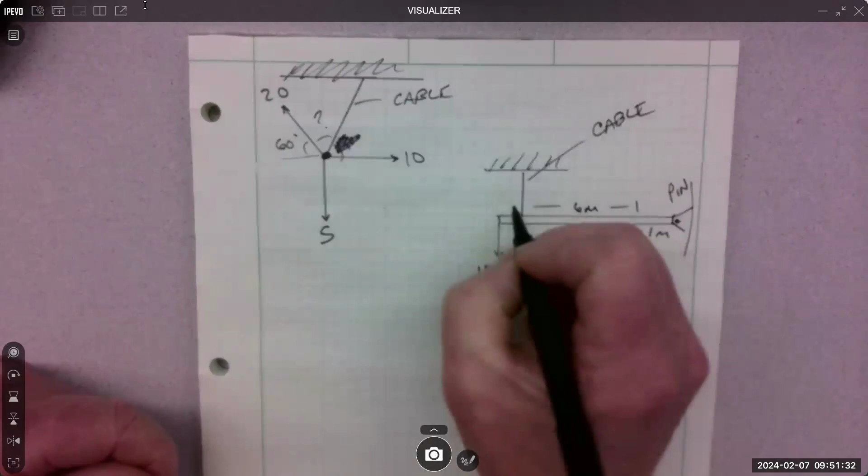All right, so the big difference is, if it says find the resultant, what do we do with supports? You ignore them, just leave them. Don't touch them, don't put in reactions, or you're gonna be really confused. Okay, so if it says find the resultant, you're just taking external forces and combining them into one force.

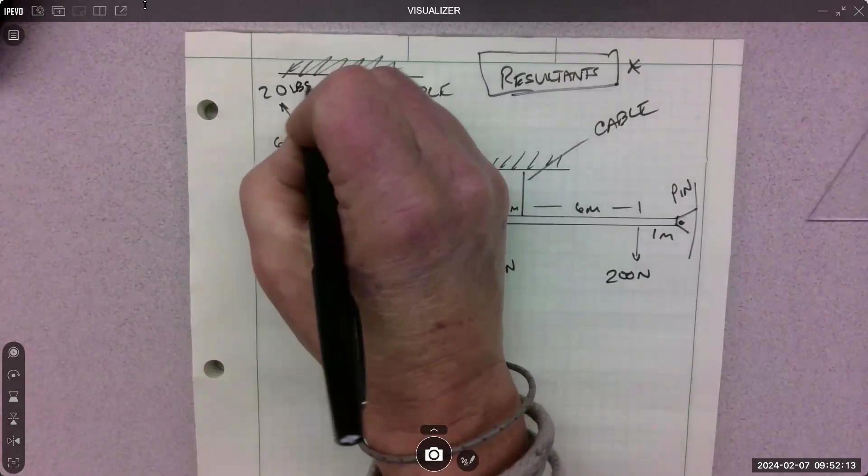What kind of a force system is this one? Concurrent. Which one are we doing first? I don't know, I just wanted to show you both. Oh, so we're not doing these? No, we'll do them. Which one do you want to do first? The beam? You want to do the beam first? Whoa, so it's non-concurrent, right?

Right, so two different problems. We're doing the beam first.

And it says, find the resultant of the given force system. Okay? Find the resultant means leave the supports alone. We don't even know what those supports mean. For the first four weeks of this term, we had no idea. We just ignored them, right? How many external forces are there?

2. 100 and 200. So our goal is to turn those into a single force and find where it acts on the system, right? So how do we do that?

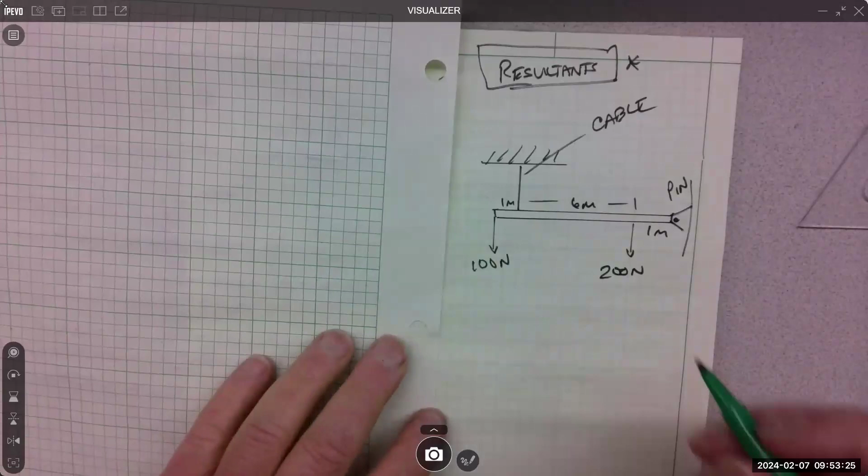Moving one of them. Move them to some spot. You can move them anywhere. You can move them all to C. You'd have to move two forces, right? Keep it easy, make it easy on yourself. Move them to A or move them to B, because then you only have to move one force.

So if I move them here, 100's already there, I don't have to move it, right? I just have to move the 200.

You could move the 100 to here, or you could move the 200 to here, either one. If you choose C, you got to move them both to C. It's more work, right?

All right, let's move them to A. Sound good? All right, how do we do that?

Just come down, you all right? Yeah, okay good, you can just... So we move both the translation and the rotation, right? The translation is 200 down, so I move it over. Remember this? Yep. And then how do I get the moment over there?

I just calculate the moment and bring it over. How much is the moment?

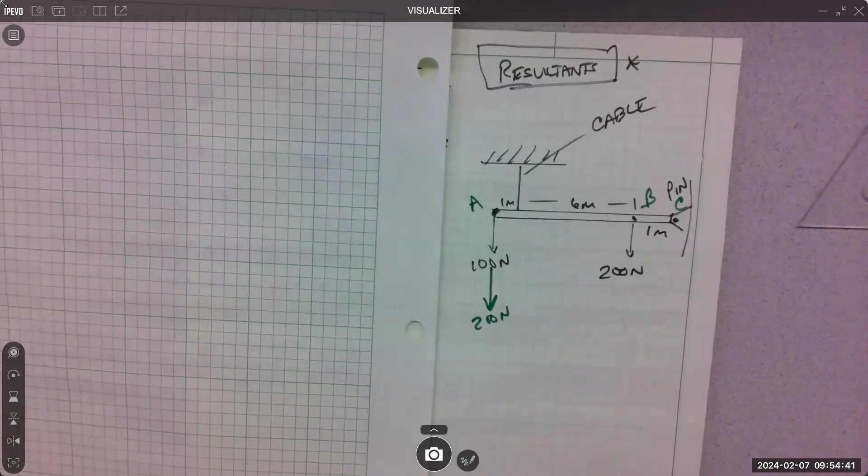200 times 7, 1400. What's its rotation? And its unit is Newton meters.

So now I have all the external forces collected at A. If there were 4 of them, you gotta move 3 to the 1, right? You just gotta get them all at one spot.

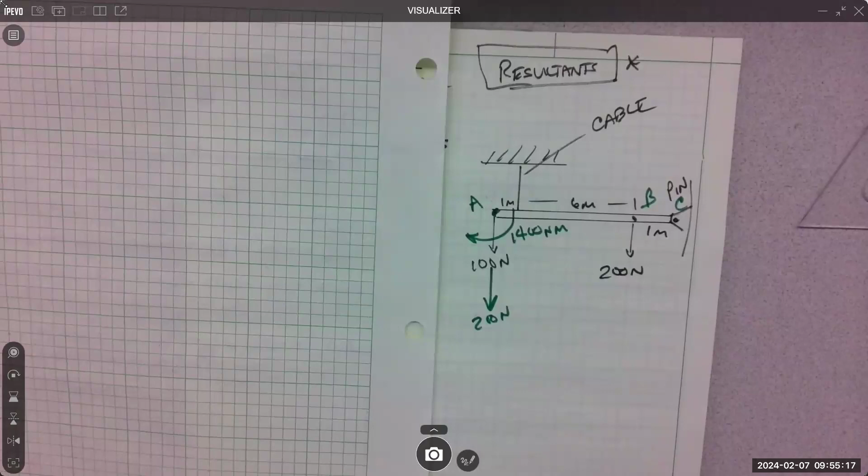So at A, here's my new point A. I have the translational effect of 300 newtons and the rotational effect of 1400 Newton meters. And there's my beam.

So what's the resultant? What's the magnitude of the resultant equal to?

Don't let my words trick you. 300, yeah, R equals 300. So that's a big part of the answer, because the question was, what's the resultant?

Now I just need to know where it is. Where is it at on the beam? How do we find that? So if you solve for distance, it's moment divided by the force.

So this is the force, so the perpendicular distance is a nice x distance. I know it moves to the right because I have to create this kind of rotation. So R being out here does create that right rotation. It's going to create that kind of rotation. So that's why I know it moves out there.

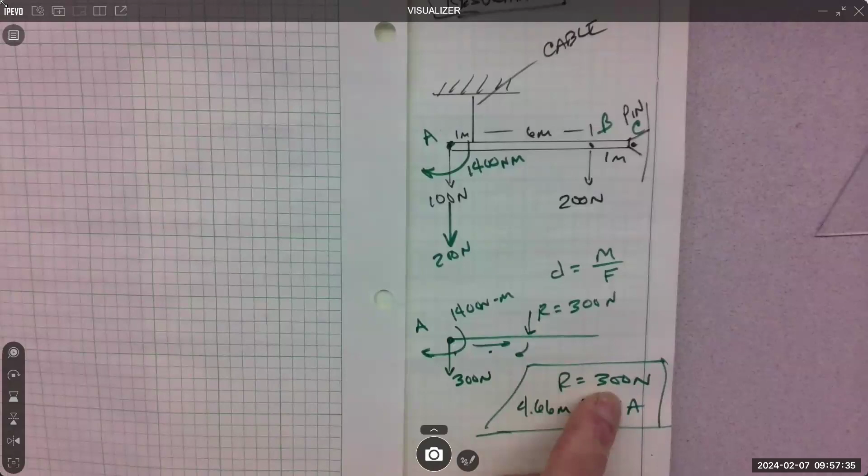We did not touch the pin. We did not touch the cable. Leave it alone. If you're finding the resultant, you're just working with the external forces.

Remember that? Yeah, we did that a lot, like a couple of solid weeks. All right, then there was this kind.

Again, it says find the resultant. So that means this force system, 10, 5, and 20, is what we're working with. And the cable, we just ignore it. Some cable.

Okay, how did we do this kind? We have to collect all the forces at one spot, but that's already happened for us. So it's a concurrent system. We don't have to collect it at one spot, it is at one spot.

So now how do we find the resultant? Find the x components, find the y components. Sum up all the x effect, sum up all the y effect, Pythagorean theorem, boom, you got R.

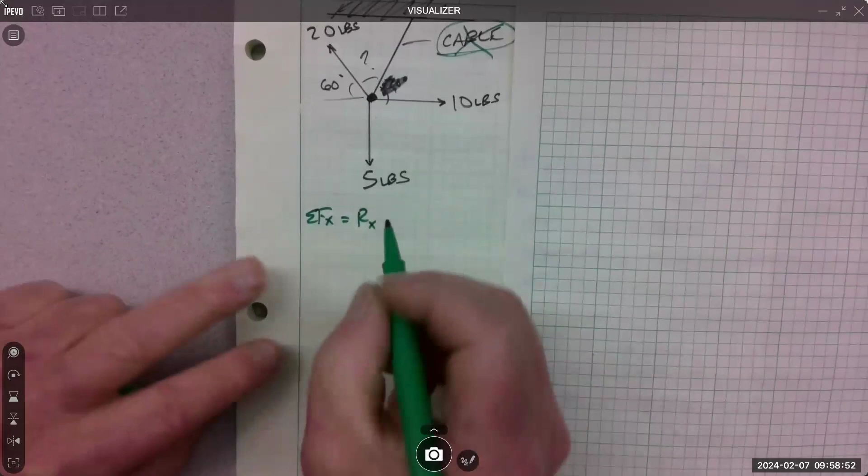So let's do it. Sum forces in the x is going to give me the resultant x component, which is going to be plus 10 and minus cosine 60 times 20. I have a lot of room, so I stacked them.

It does not equal 0, not when you're doing resultants. It equals Rx, the x component, right? So don't toss in equals 0 because no, it doesn't. Rx equals 10 minus this number.

That equals 0. It does, that's funny. That was random, you guys. I didn't mean for that to happen. But it does equal 0. It does make zero as I hit enter. Yeah, nothing, just don't write it in this equation, I guess. Prove it does equal 0. Wow, that was just bad luck.

That's funny, so it doesn't equal zero by default. It does not. The resultant can definitely have an X component. This just is telling me now that, oh, the resultant is all in the Y, right? The only reason it happens is because it goes like 60s, which we know, because Jorge taught us that. Or if you know your specials.

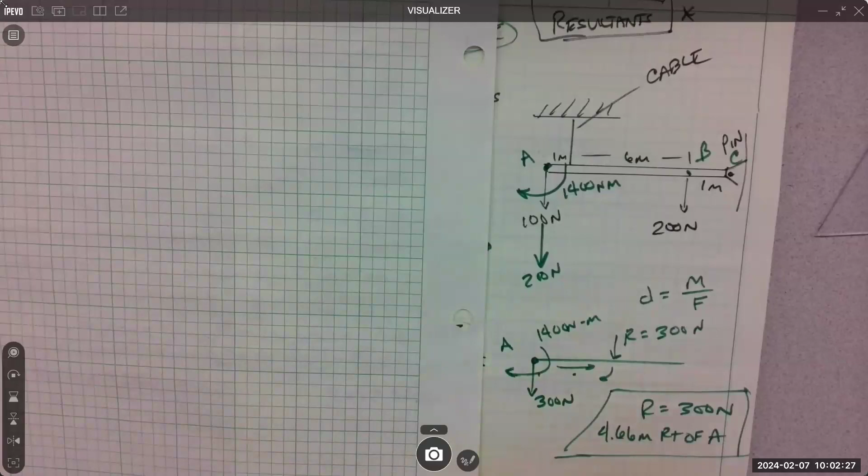If the problem says find the component of a force, and you're given this... oh, where'd it go? Where's the big complicated one? Oh, I lose the truss already. Oh, there's the truss. Yeah, if you're given this, and it says find the X and Y component of the 400-pound force.

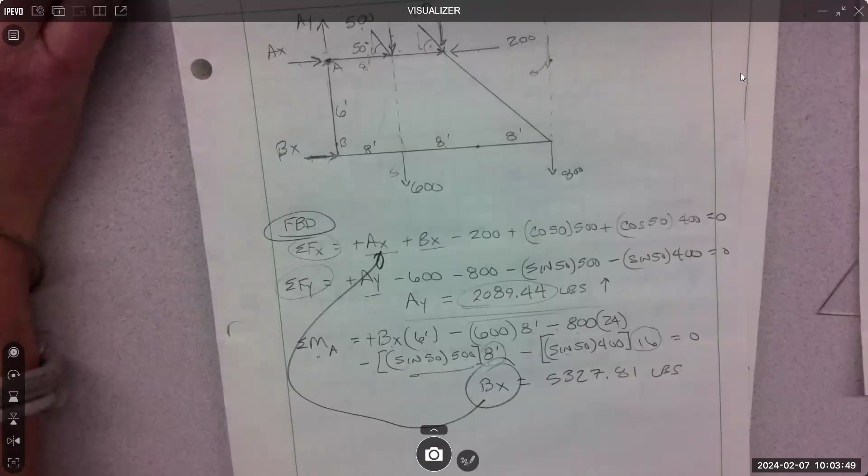All right, good job. So the result...